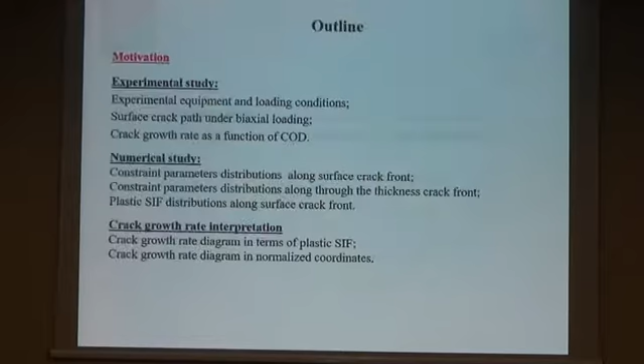Let me introduce the outline of my talk. The present study can be divided into three main sections. The first is an experimental study of surface crack propagation in cruciform specimens under biaxial loading. Then I will discuss numerical calculation of in-plane and out-of-plane constraint parameters along a crack front in cruciform specimens.

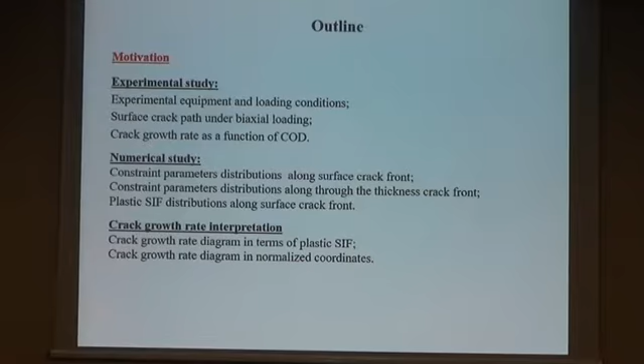The last part of my talk concerns crack growth rate interpretation. Some words about motivation: fatigue crack growth rate study is one of the most important elements in structural integrity prediction for structural components with accumulated operational damage. In most cases, operational damage appearing on the free surface of structures is approximately considered as a semi-elliptical surface crack. Biaxial loading conditions are typical for metallic components of engineering structures, such as turbine discs, airplane fuselage skins, pressure vessels, and so on.

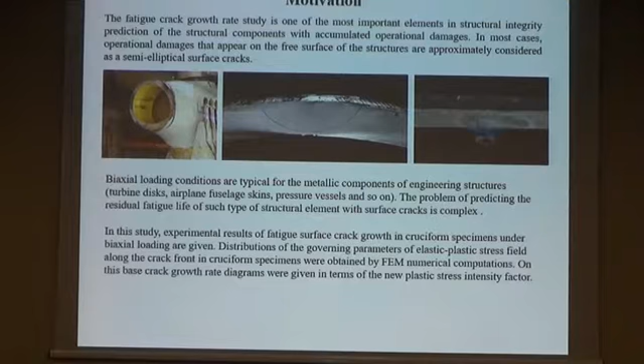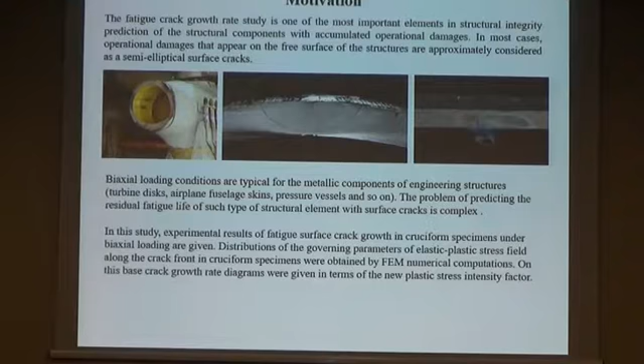The problem of predicting the residual fatigue life of such structural elements is complex, and the actuality of this problem is evident. In this study, experimental results for fatigue surface crack growth in cruciform specimens under biaxial loading are given. Distributions of governing parameters of the elastic-plastic stress field along a crack front in cruciform specimens were obtained by finite element method numerical calculations, and on this basis, crack growth rate diagrams were given in terms of the plastic stress intensity factor.

The subject of this study is cruciform specimens with surface cracks. Surface crack growth study was performed for equibiaxial tension, biaxial tension ratio 0.5, uniaxial tension, and equal biaxial tension-compression. All tests were performed for aluminium alloy D16T, and its main mechanical properties are listed in this table.

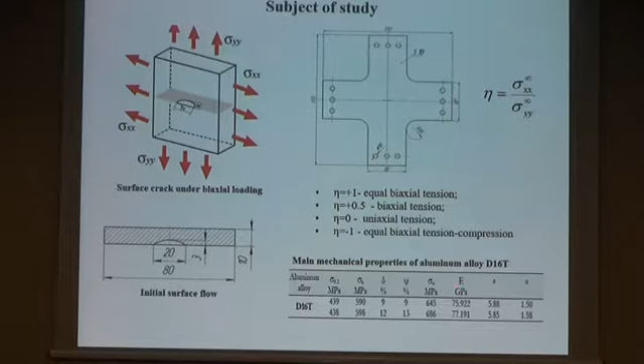The fatigue crack growth rate tests were carried out with a servo-hydraulic biaxial test system at room temperature, with sinusoidal loading form at a frequency of 5 Hz, and stress ratio R equals 0.1. Both optical microscopy and crack opening displacement method were used to monitor crack propagation during the test.

In order to fix and highlight the crack front positions as a function of accumulated number of loading cycles, several benchmarks were produced by increasing the stress ratio from 0.1 to 0.75, with a constant value of maximum cyclic stresses.

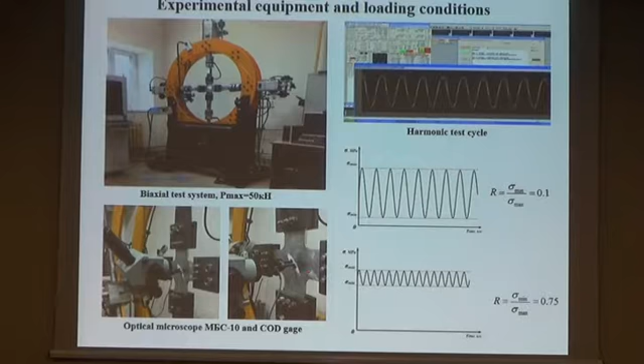In this figure you can see the experimental crack front positions as a function of accumulated number of loading cycles. These results show that the fracture process in cruciform specimens can be divided into two stages. In the first stage, the crack propagates as a surface, semi-elliptical crack, and in the next stage, the surface crack completely crosses the specimen thickness, after which it propagates as a full thickness crack.

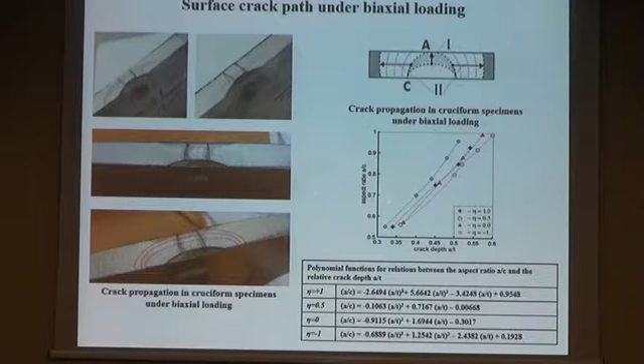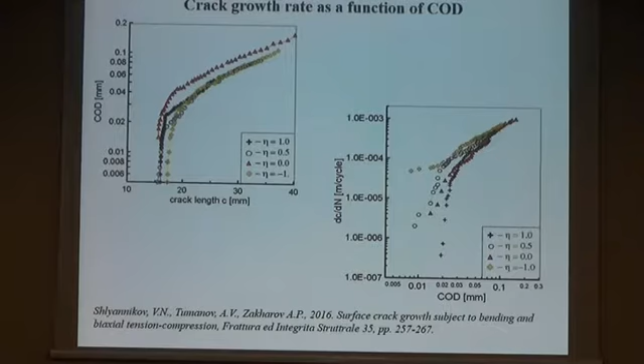That concludes the experimental results, now we discuss numerical calculations. These are concerned with stress-strain analysis along the crack front in cruciform specimens for all considered types of biaxial loading, taking into account the in-plane and out-of-plane constraint parameters. On the basis of solutions for the governing parameter of the elastic-plastic stress field along the crack front in cruciform specimens, we calculate the plastic stress intensity factors for crack growth rate interpretation.

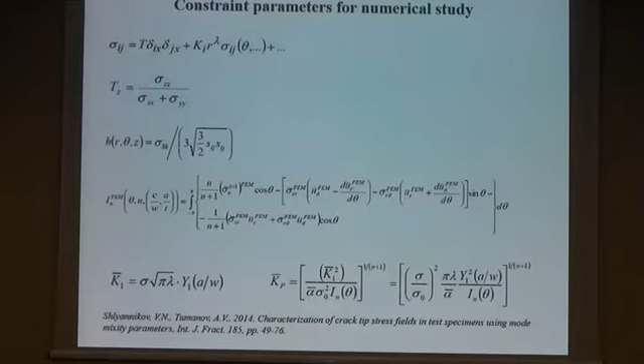Finite element analysis was performed for both surface cracks and through thickness cracks. You can see the typical finite element models for cruciform specimens. For representation of our results, we used dimensionless coordinates.

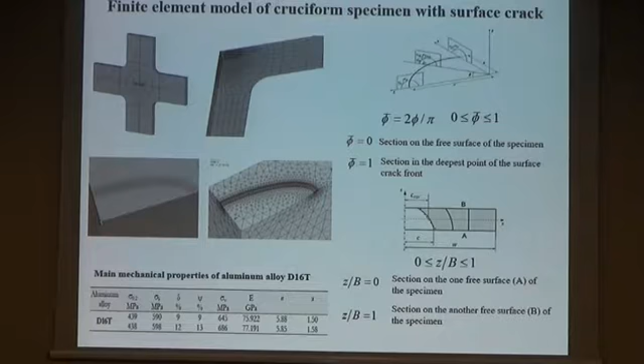In this figure, you can see distributions of stress triaxiality parameter and governing parameter of elastic plastic stress fields, the IN factor. It should be noted that all of these constraint parameters are significantly changed along the crack front, as well as they are a function of loading biaxiality.

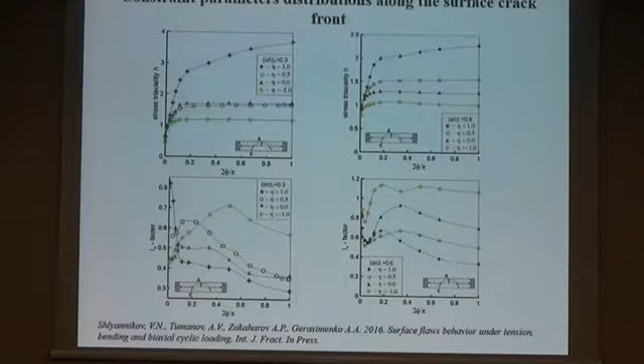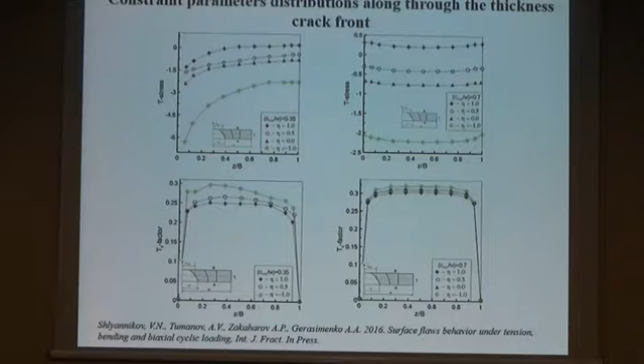In case of through thickness crack, constraint parameters also are represented for two crack front positions determined by equivalent crack length 0.35 and 0.7. So we can see distributions of T-stress and TZ factor, and then in this figure you can see the distributions of stress triaxiality and IN factor.

Compared with surface cracks, the parameters T-stress, TZ factor, and stress triaxiality have a more uniform character.

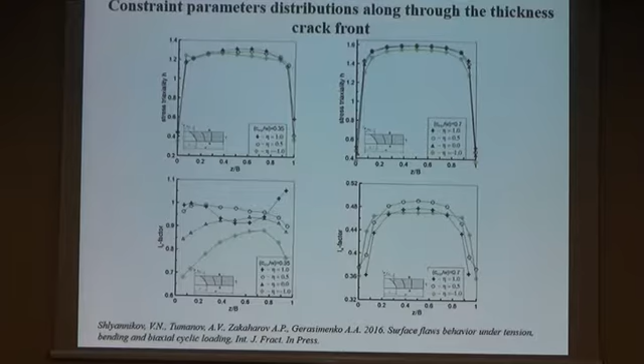As mentioned above, on the basis of the solution for IN factor, we calculated the distributions of plastic stress intensity factor along the surface crack front and along the through thickness crack fronts, inclusive of specimens for all considered types of biaxial loading. These numerical results were used for crack growth rate interpretation.

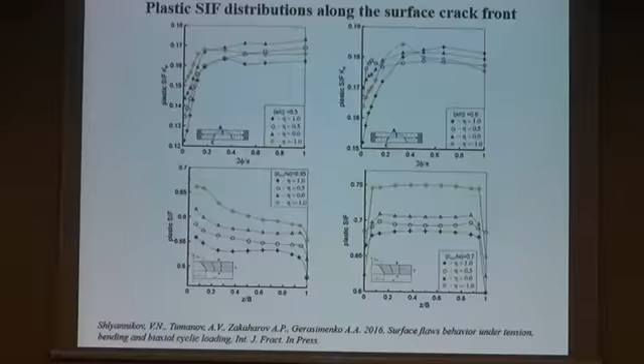Let's come back to our experimental data of crack propagation in cruciform specimens under biaxial loading. You can see that there is a strong correlation between crack opening displacements and crack length.

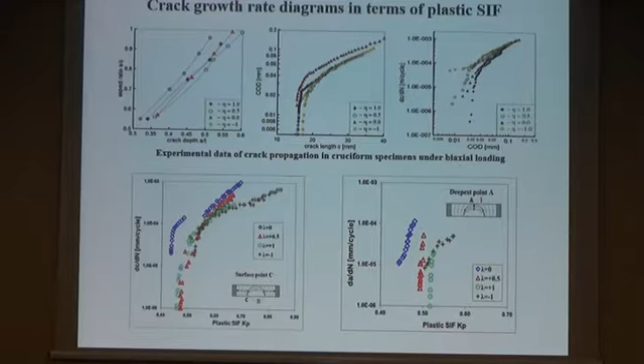Crack growth rate diagrams in terms of plastic stress intensity factors in this study were introduced as a generalized diagram in normalized coordinates. You can see that experimental data for different types of biaxial loading remain within a narrow scatter band, and such a generalization allows us to obtain a single curve that describes a strong correlation between crack growth rate and plastic stress intensity factor.

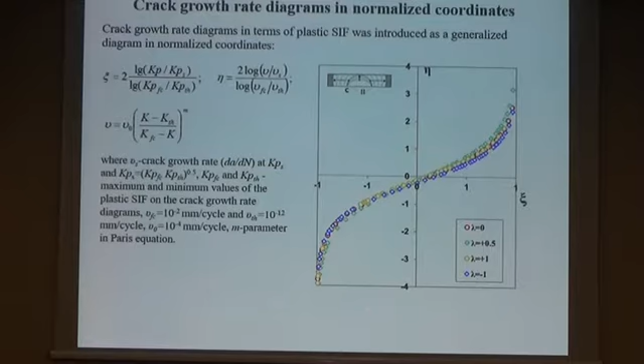So, the conclusions of my talk: fatigue surface crack propagation in cruciform specimens from D16T aluminum alloy under biaxial loading was studied. Experimental results showed that biaxial loading leads to two main stages for the cyclic fracture process of the surface crack.

The experimental and numerical results of the present study provide the opportunity to explore the suggestion that crack growth rate may be represented by the plastic stress intensity factor rather than the magnitude of the elastic stress intensity factor alone.

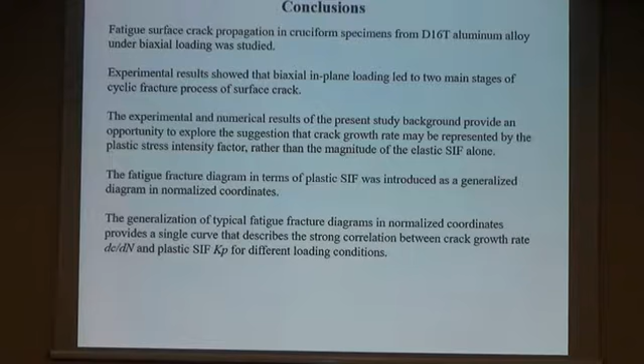The fatigue fracture diagrams in terms of plastic stress intensity factors were introduced as a generalized diagram in normalized coordinates. This generalization of typical crack growth rate diagrams provides a single curve that describes a strong correlation between crack growth rate and the plastic stress intensity factor for different loading conditions.